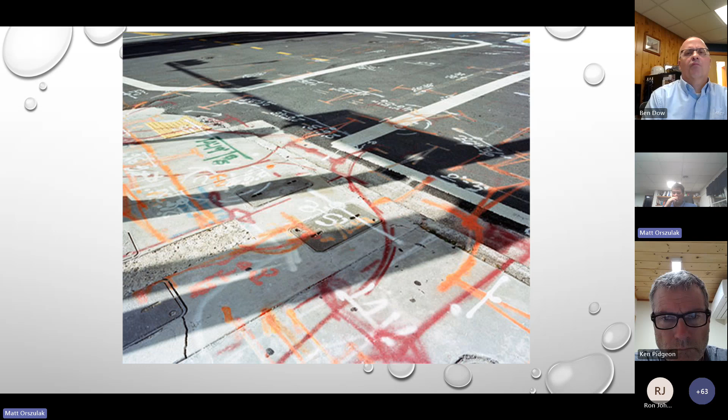So with that said, we just got a call on a water break underneath this one. Who wants to go try to figure out what's underneath all this stuff? More of a joke—hopefully this is what we see. The goal moving forward is to see a lot more paint done properly and in a timely manner inside our excavations. So we'll see what happens.

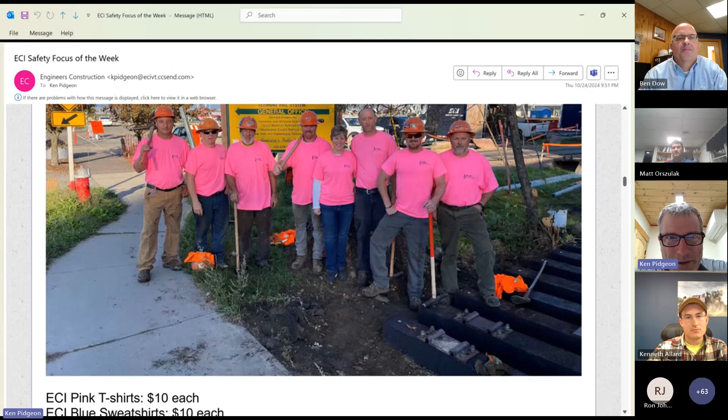October is Breast Cancer Awareness Month, so again, we're encouraging pink. I got my pink T-shirt on here. We're encouraging that breast cancer awareness color, and there are T-shirts and sweatshirts available. Check with Sarah. All the donations, all the proceeds go to the breast cancer charity we selected.

We also have the ECI Primary Care Wellness Program Summary link here, the document, as well as the contact info to make an appointment at Champlain Medical Urgent Care, and we have their location, over on Kennedy Drive, really easy to get to from the shop. And the ECI Employee Assistance Program info and contact info here.

For this week, we're talking about the emergency slope stabilization we did for VTrans in Plainfield, on Route 2. Ken Allard, are you out there? Hey Ken, you want to take over, or you want me to drive here? You can drive. Okay, I'll scroll a little bit and let you start.

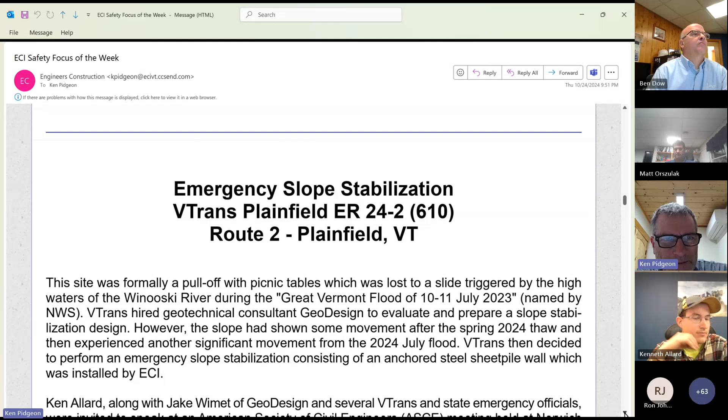The site was formerly a pull-off with picnic tables, which was lost to a slide triggered by the high waters of the Winooski River during the Great Flood of July '23, or the Great Vermont Flood of July '23. VTrans hired GeoDesign to evaluate and prepare a slope stabilization design, but earlier this year the slope started to move more, and they decided to go with a more emergency design, putting in sheet piles and an anchored wall that we installed.

The guy from GeoDesign, Jake, the designer, and I went to Norwich and gave a presentation to the folks from ASCE there. Was that last week, two weeks ago? It was last Monday, not this Monday, but the previous one, the 15th.

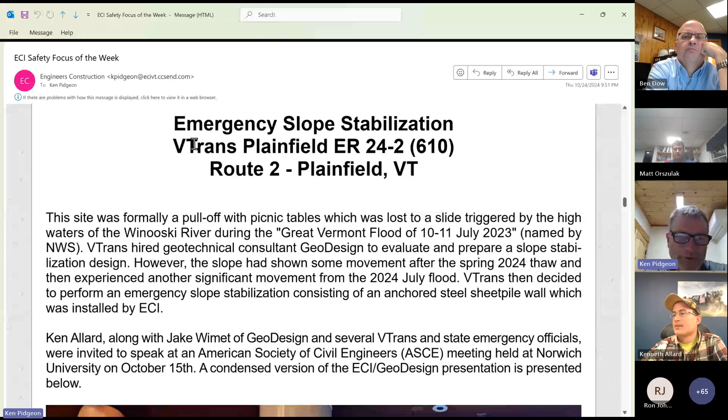Goes quick. Want to scroll down? There we go. That's Jake and Ken. Had to put that picture in. Good one, Ken. You want to go to the next one?

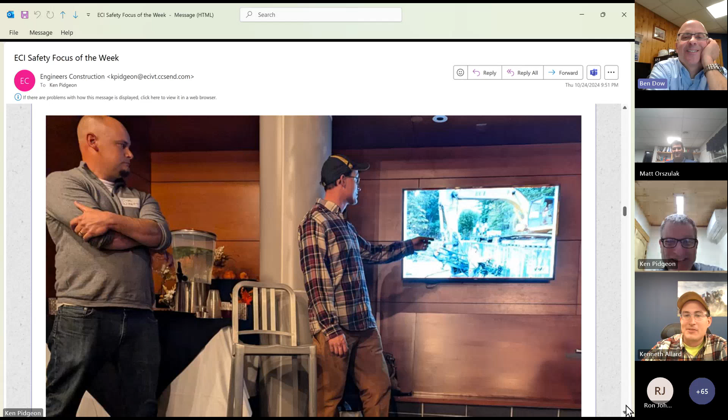That picnic table has some serious CMP foundations—it's got to be 10 foot in the ground. Nobody was going to steal that picnic table.

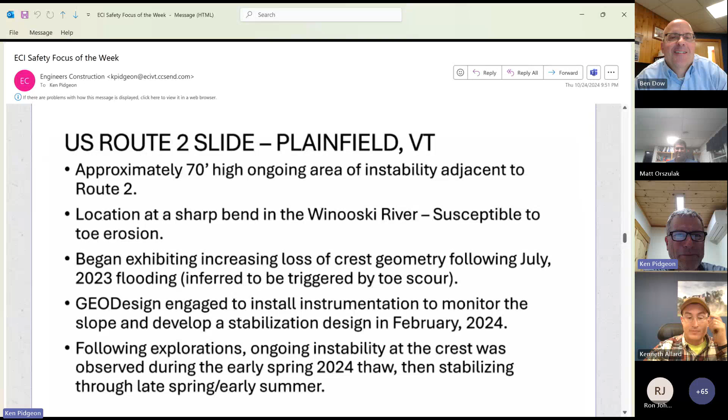Okay, this is from your slideshow. Yep, so again, the slope just started to fail and then fail faster. Originally, they were going to do just a stone fill slope and then something a little beefier at the bottom, and things started to move.

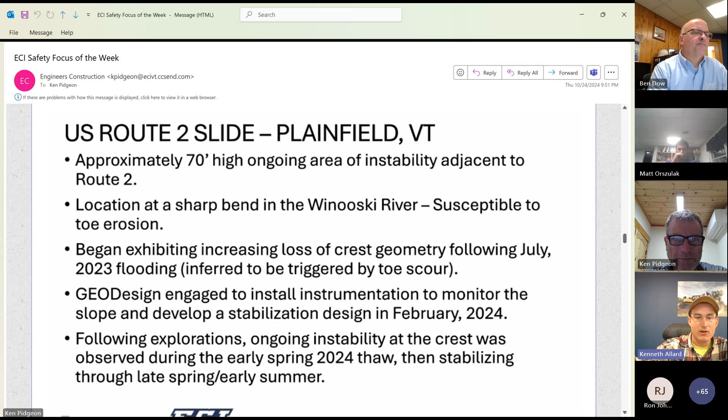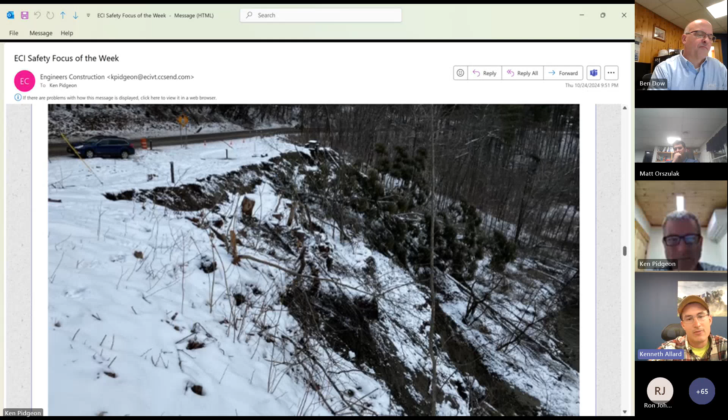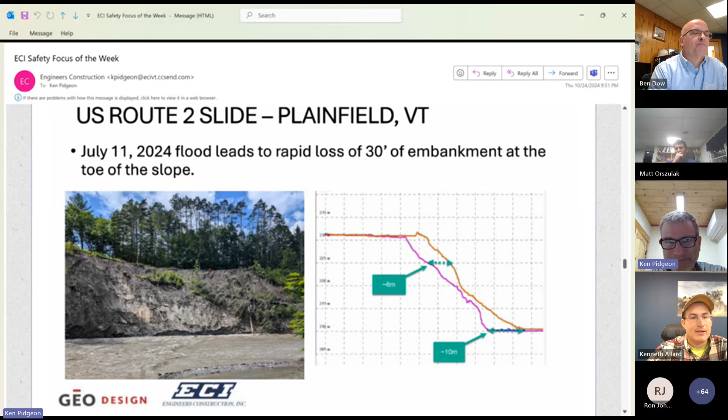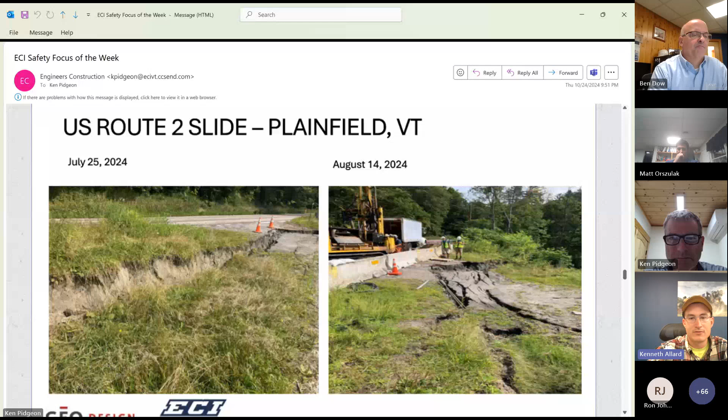Then they started to realize they needed to monitor things. They mobilized equipment to drill in inclinometers, and I think they might have put a well point in. And as they went on, this kind of shear face started to develop a little bit further back. By the time we got there in October, there's about a 5-foot shelf, similar to what you see on the right there for August '24.

So we did this job knowing it was going to be a challenge. We'd have to work from Route 2. They gave us a 2-week road closure with a detour, which really wasn't that bad—I think it was like a 10-minute detour up and around.

But the challenge was that where the sheets had to go was directly under the communication lines. The slope was unstable. You'd have to put a crane right on Route 2, which is about 10 feet from the failure face at the narrowest spot, and you're going to be running a vibratory hammer on that slope that's 70 feet tall. But we felt comfortable we could do it.

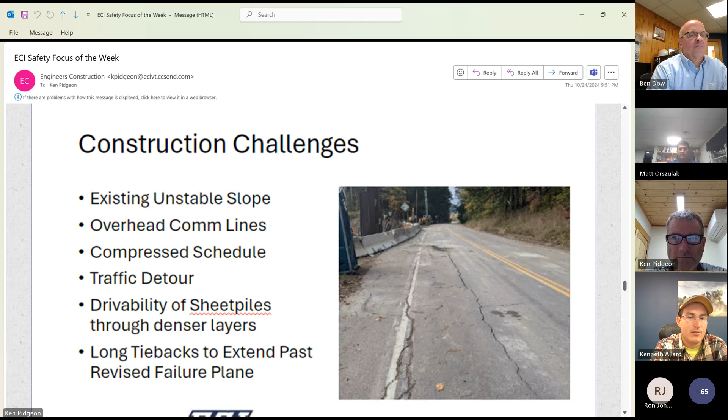Working from kind of the far end of that picture, the failure surface was farther away, so we were able to build the wall and then have some security working behind the wall as we advanced it closer to the narrow section of the road.

Yeah, we had some trouble with the hammers, but ultimately we ended up renting a bigger vibratory hammer, and encountered a pretty stiff layer about 20 feet down. These sheets were intended to be 40 footers, but I think their minimum was 25 feet. We found that if we could get through this stiff layer, which was about 20 to 25 feet down, they seemed to go good after that, but not all of them made it past that layer, which VTrans was okay with—they didn't want to destabilize the slope anymore by just pounding it.

And then we had sheets, and then we had to drill tiebacks 3 feet down, at a 15-degree angle. There's 60 tiebacks on this wall, which was 265 feet long in the end.

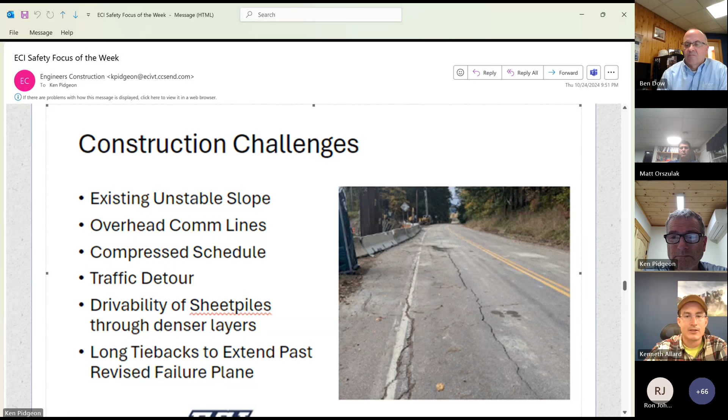As we went, this crack in the road developed, which you can see, probably 10 feet from the yellow line. We think it's probably just the edge of the old concrete slab that's under the road, but Geodesign and VTrans were getting pretty nervous about it because it was growing every day. Ultimately we ended up drilling tiebacks that were at most 70 feet long when the design only called for 35-foot tiebacks—pretty substantial increase, but they pay by the foot, so we're good and they're happy.

Here's just a picture of the sheet. They were actually—were they 14s, Ken? I can't remember now, PZC 14. Yeah, they're PZC 14s, right. Yep, not PZs.

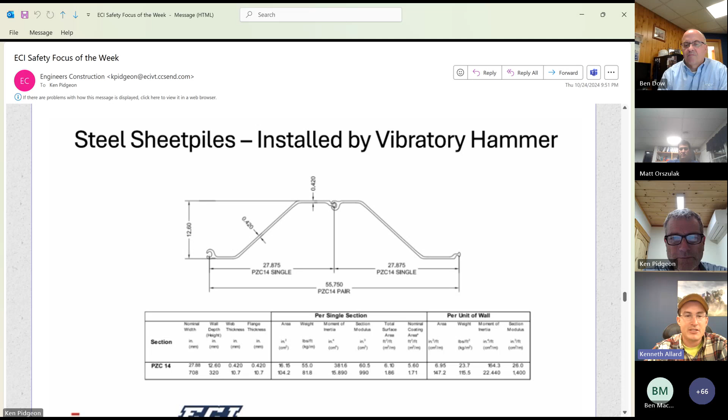We actually fought the sheets pretty good because, you know, they're 40-foot sheets, and in some of the worst cases there was about a 2.5-inch belly in them in the strong direction—like if you pull a string from one end of the sheet to the other. So not just hard ground driving conditions, but the sheets didn't want to thread very well either, and that really increased the difficulty of the job.

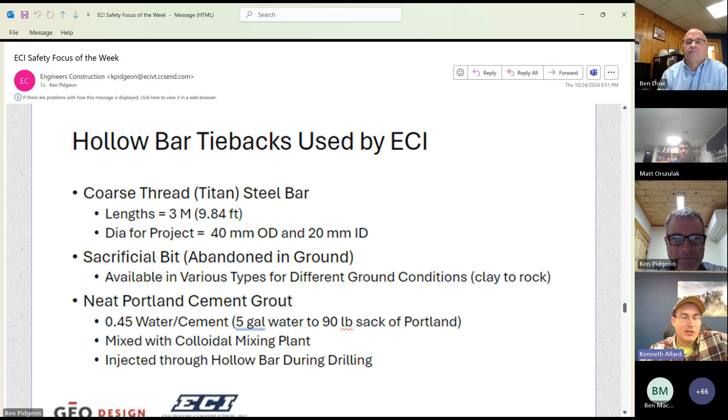This slide was just talking about hollow bar work, which I think we're pretty familiar with. Yeah, our standard hollow bar tiebacks.

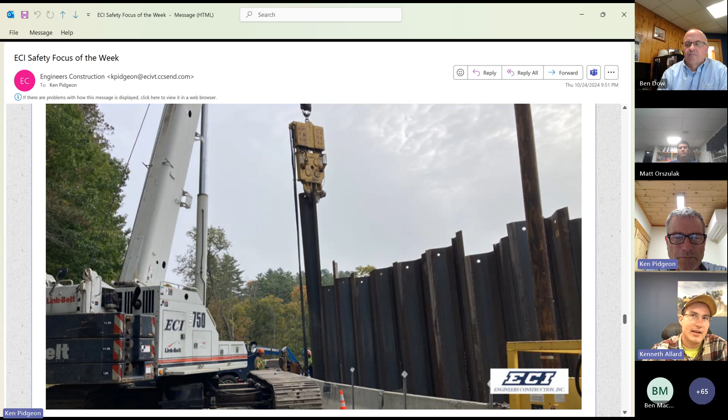Here's a rental hammer that we rented. It was a 3,700 inch-pound driving moment hammer. Just to compare, our ice hammer is a 2,800, and our small yellow one's a 1,200. So pretty big hammer for us, but it definitely hits a lot harder than the ice did.

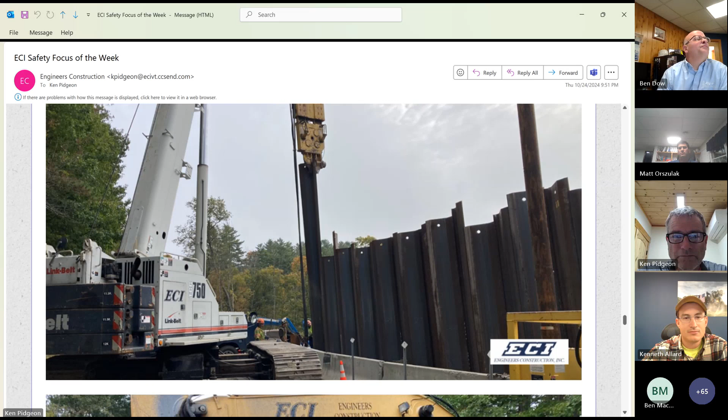Picture of the guys drilling. Grout plant in the back, 230 drilling. Worked pretty good. The state was surprised.

They had this requirement - they didn't want us to dig more than 5 feet down. I think they were relying on the weight of the soil for toe stability. I'm not 100% sure, but they didn't want us to dig any more than 5 feet down. They were just surprised at the volume of excavation needed to get in there and actually drill it.

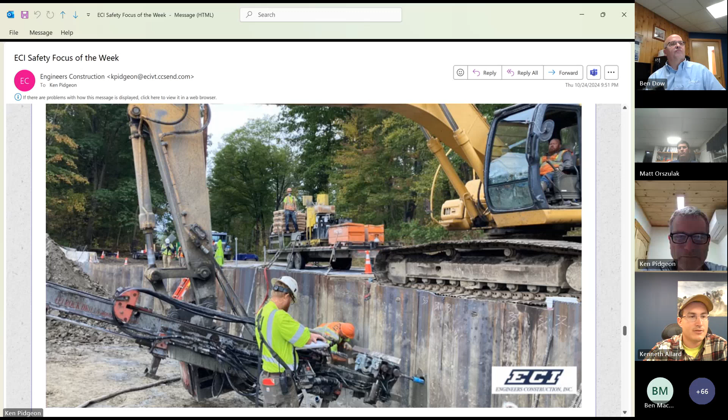Here's a picture of the whole site. I think this might have been the most productive day. There was hammer driving going on. Ricky was in that 220 there on rubber digging, and you guys were drilling.

Walked around the grout plant. It was tight. The cable is laying on the ground so it's out of your way. We had to work around the communication cable - we couldn't end up driving with it up in the air, so they dropped it for us, and we just had to keep moving it around so we didn't run it over.

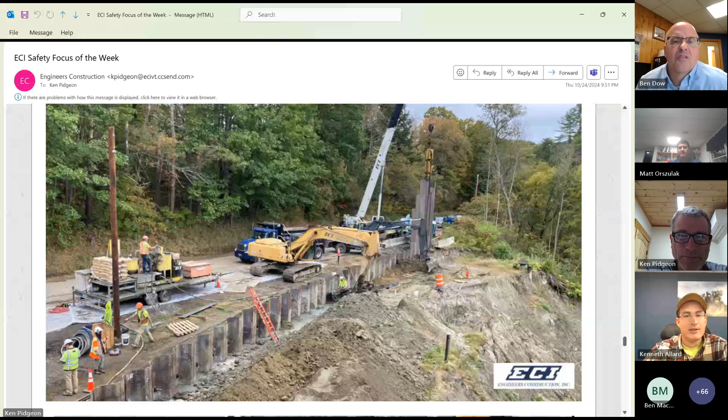Picture of the soil nail testing and lock off. They had us test them to what it was designed - 25 kip, I think. Yeah, 25 kip. Not very high, it's not that bad for a tieback.

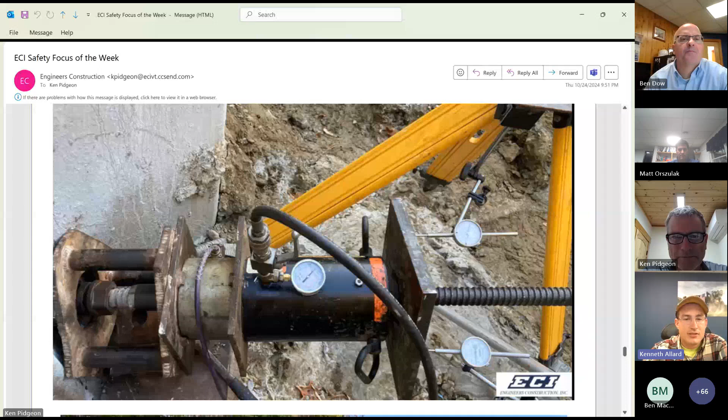A picture of the finished site. Might have grass growing by now. We got it all done, and then VTrans was like, actually, here's a written order.

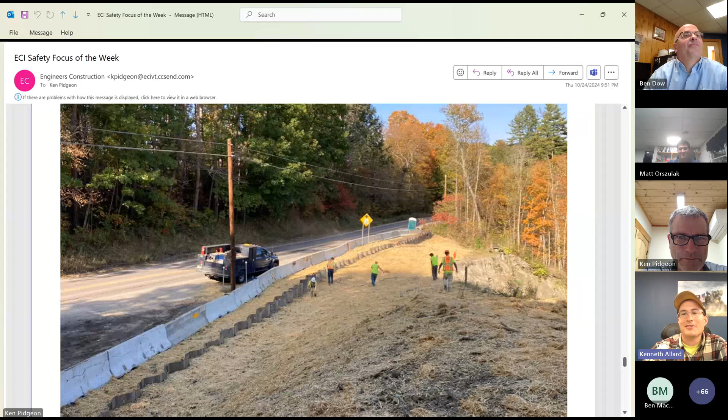We want you to pave this section of road. And then we gave them that number, and they were like, actually, we want you to install guardrail and remove the Jersey barriers. We started to give them that number, and they were like, actually, now that you're all ready lined up to go, let's just cancel it. You guys are good, we're all done. Yeah, I scheduled it, Ken. They canceled it.

Well, thank you, Ken. It's a good project, a cool project, and a good presentation. It was pretty cool to have Ken presenting at the ASCE meeting with the state officials.

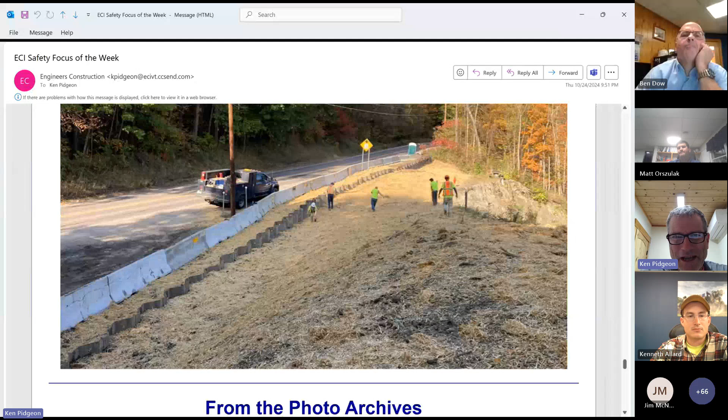We had Andrea Wright from VTrans - she's an upper level environmental policy person, and there was this Ben - I can't remember Ben's last name, he's the state geologist. And then another guy who's kind of an emergency coordinator for the state. So it was really cool, it was a good presentation. It was neat how all the different angles of these emergency flooding conditions are covered.

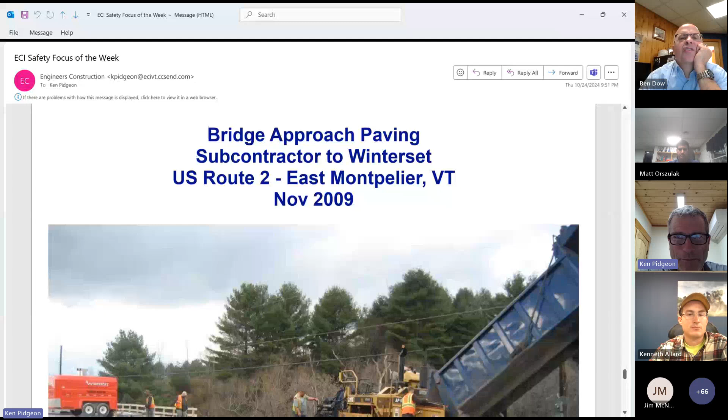From the photo archives, this is the bridge approach paving we did as a subcontractor to Winterset, just down the road towards East Montpelier, on Route 2. This is back in November 2009. Oh hey, nice Ken, map.

One thing I'll mention about the Plainfield job is a 270-foot long wall, 40-foot sheets, that came bent. They had some mill defects, which we've seen before - we saw it in Middlebury. It makes it very challenging. But no laps in that wall, which we couldn't have any laps - it wasn't permissible to do that, but that's pretty impressive. The guys worked hard to achieve that during the shutdown too, so we're pretty happy with that.

Yeah, for sure, it was a good job. All right, well with that, I'll turn to safety.